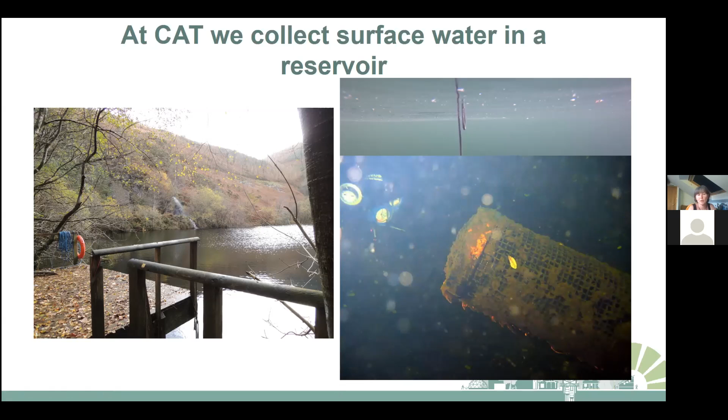So we use a kind of pipe here. As you can see, it looks very nautical. It's kind of a mesh pipe, which means we don't accidentally suck in fish and other bits we don't want. It's actually got its own biofilm growing on it, which does a little bit of water filtering as well, interestingly.

Then it travels by a pipe that you can just about see in that image. There it is, comes up better. And that pipe travels downhill. Now that's quite important, that we're using the natural availability of slope to carry our water from the top of the hill to the bottom of the hill. And that pressure of water that goes from above to below, the kind of potential energy in it, is called head. It's a word I might use later.

Okay, so what could be in this water and how do we get rid of it? Before that, I'm going back to this one. I think there's a little poll that Meg's going to put up. What are your instincts telling you about this water? This is something I would do with my students or my tour people, and we would actually get a glass of the water and look at it, feel it, and smell it, and say what our gut feeling was about it.

So I'd like to ask what your gut feeling is, if you're able to answer this little quiz. The preferences are: yeah, that's fine, safe to drink. Maybe I would drink it if I was really, really thirsty. I'd only drink it if it was boiled or filtered. No way, get me to a tap of nice water where I don't have to think about where it comes from.

Okay, we've got some answers. Oh, they're coming.

Okay, so the instincts are: 6% are saying yes, safe to drink. I'd say these would be the ones who'd maybe be a gambler on Who Wants to Be a Millionaire. Then there's drink if I was really thirsty - I probably come into that category, and I also know what's in it, so that helps. I'd drink it if it's boiled or filtered - that's a sensible answer, most people have answered that one. And it looks like maybe one person is really not happy with even the idea of answering a quiz to say they might drink it. So that's great, thank you very much.

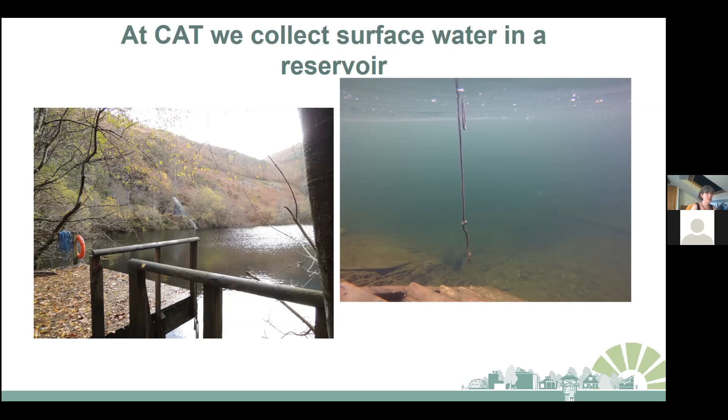Okay, so what's in the water and how do we get rid of it? The most urgent and potentially lethal things are microorganisms, dead animals, or poo - basically that's the most dangerous thing. And the microbes that are dangerous to us generally live on mammal poo. So how do we get rid of it? The good thing about microbes is we can kill them very, very easily just by boiling.

So it's great if you're by a campfire and you can boil your water, and most places in the world have facilities for boiling, so that's great. But if we're doing that on a larger scale, we can't boil every milliliter of water that comes on site. So what do we do instead?

There's several options. I'm going to just gloss over, but then we're going to see what we actually do. You can use a sand filter, a mechanical filter which sometimes uses energy, an activated carbon filter which has got a lot of embodied energy behind it, a reduction oxidation filter, or a chemical, which is the most common way water is cleaned, and that chemical is chlorine.

Chlorine is an amazing chemical because it kills all these pathogens, and it doesn't just kill them at the source, it kills them all the way along the pipe until it comes out of your tap, which is why we're used to very, very clean water. There are some issues around it, but basically it's kept Britain and many countries healthy and not dying of dysentery in their infancy. So it's a good thing in my books.

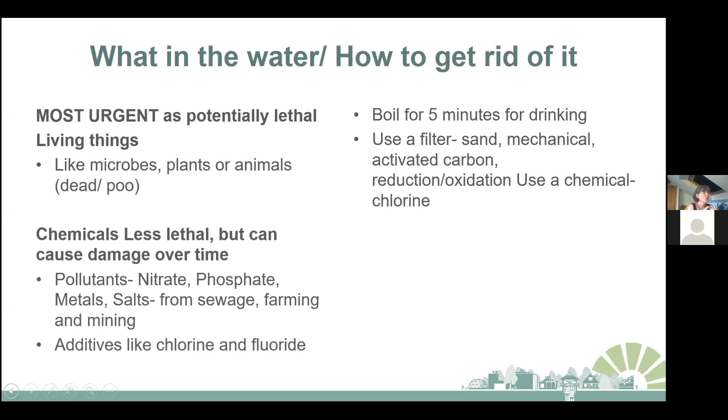Then there can be metals and salts from sewage if you're in an urban area, or from farming and mining if you're in a rural area. So we've got quite high copper in our reservoir, which is why it has that lovely blue colour.

And then you might have these additives in your water, which are chlorine and fluoride. Fluoride comes naturally in a lot of places. It doesn't happen in Wales, but it happens in lots of other places.

The thing about chemicals is you can't boil them away, so you'll have to filter them in a different way. The main way we use on a small scale is an activated carbon filter, which has this added embodied energy. If you were in a large-scale sewage treatment system, you would do something called chelating them out - you'd put dolomite in, and it would settle it out, and you'd throw that away. It's quite linear, but it does get rid of dangerous things like arsenic and lead out of your water, which is very important.

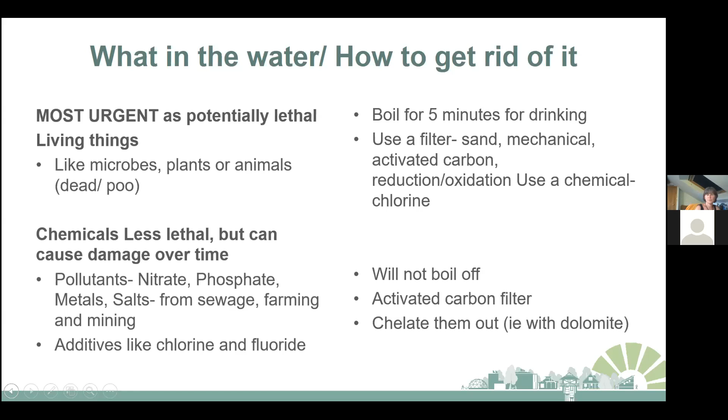So types of filter we might want to use, I put them under three main headings. We've got the zappers, which literally blast the microbes and burst their cells. Then we've got the sieves, where the water goes through and the lumps stay behind. And then we have ones that I call sticky sponges - the microbes and chemicals stick to the surface of them, and then they can be pulled off by other microbes and used as plant food.

So these use a thing called adsorption, which is a bit of physics, but it acts a bit - if you can imagine rubbing a balloon on your head and then sticking it to the ceiling, it sticks there, but then it's really easy to pull it off again. It's a bit like that, but that's an oversimplification.

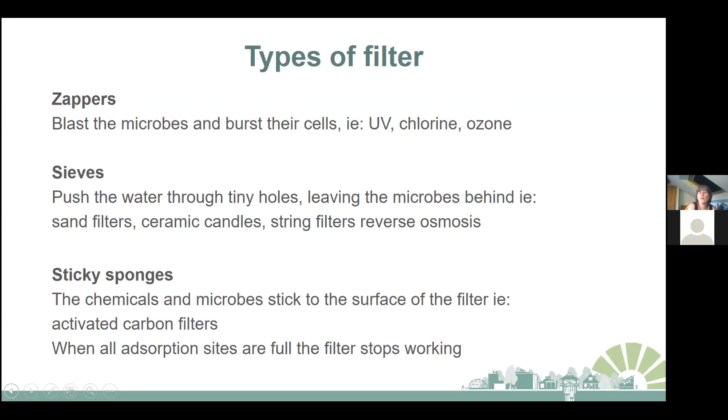And this is part of our living laboratory that we always have, is that we'll always try something out, and if it doesn't work, we have to try something else. And that's okay, we find out new things.

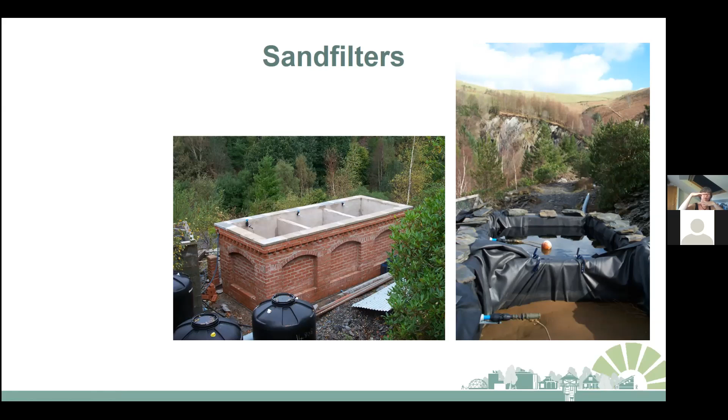And then the water slowly, the old water, the new water keeps running in, and it slowly goes down through the column and out the bottom. And that looks a bit like, hold on, it will come in a second.

Yeah, it acts like a sieve, and it's got a dirt layer, but this is what it looks like. So this one in the image has got a lid, but we don't have to have a lid. We don't have issues with mosquitoes coming into our system.

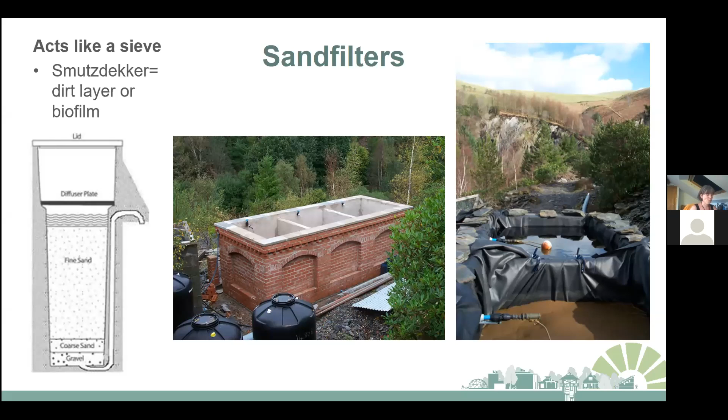So this is a picture of the Schmutzdecker, which is a German word for the living layer, or dirt layer, or biofilm, if you want to call it.

And there's some lovely MSc students. Oh, that's really nice, with that layer there. If you were one of my students, I'd say give it a sniff. So just think to yourselves what you think it smells like. And the answer is, it smells like river fish. It smells really quite pleasant, not horrible, but it smells of river fish.

And that little layer there, you see the little brown layer there, is the Schmutzdecker, and that does part of the work of the sieve. So part of it is physical, and part of it is microbial and biological.

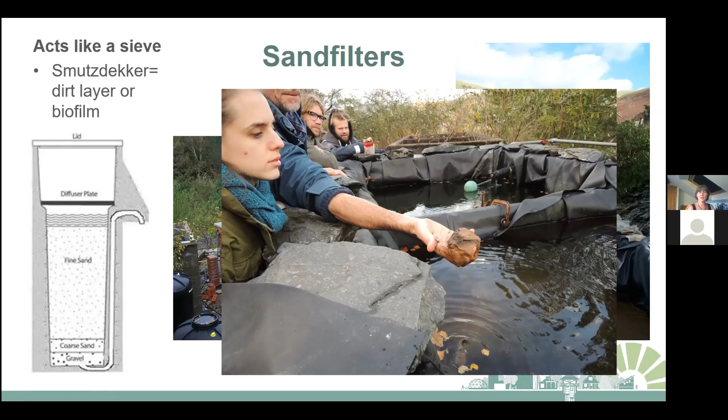Okay, it goes through a UV filter. So when I first worked at CAT, we didn't have a UV filter. We just drank the water, and very occasionally the odd person would get a bad tummy from it.

That was not okay after we started to get lots of visitors. So we now follow, it used to be the Environment Agency, now it's the NRW, which have rules on how much microbes, if you like, are allowed in the water.

And the answer is they have certain indicator species of bacteria that they grow on a plate, and they put it in the oven and grow it for 3 days at human body temperature, and they bring it out and they say, how many units have we got here? And the amount of any of those types of units that they can test is 0, because you can do 0 with chlorine. So it's 0 for Britain, 0 for all over Europe, I think.

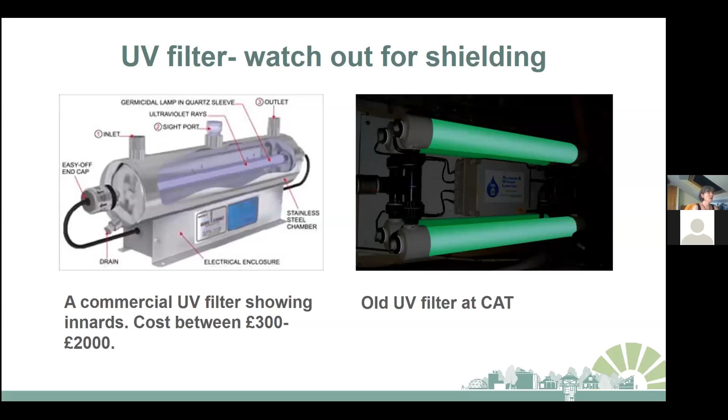So what we have to do at CAT is we've invested person power and energy into this system, so it's really important to make sure we use less of this precious resource. Actually being in charge of our own system really brings that home - you don't want to waste it, even in West Wales where it rains in metres, not millilitres.

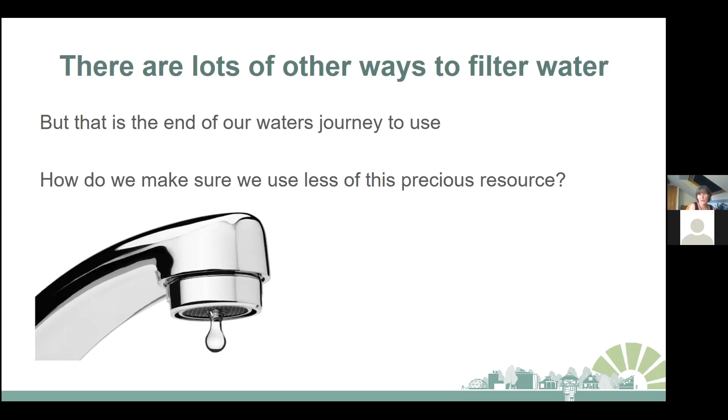Using low water appliances isn't terribly in the consciousness of the average UK dweller. It just isn't. When you go to buy a new fridge, for example, they'll say, come and look at this one, it's the super new AAA rated one, it uses hardly any energy, it's great, you've got to have this one. They won't say, actually you've got a third less freezer space, or other downsides.

But with water, has anyone been to buy a new bathroom? I'd guarantee, because I've been looking at a bathroom recently, that you actually have to hunt for the low flow appliances. It's all about luxury - I paid for my water, therefore I'll use a lot. So things like this, I know, they're very niche.

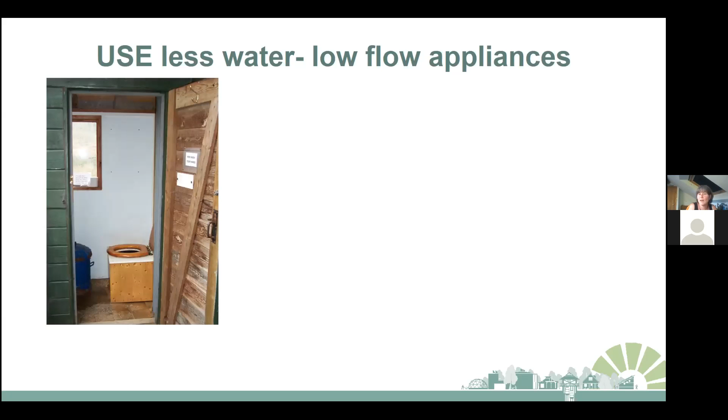I can see you all chuckling, thinking yes, maybe in my smallholding, but not in my house. I agree. These ones use no water, but there are times these might be very useful in Britain with this weird droughty climate. We might all have to have a second loo outside, which is a compost loo. There's a more posh compost loo too, for those who've been to CAT. Both really simple, both easy to make - I'll do another one on them maybe.

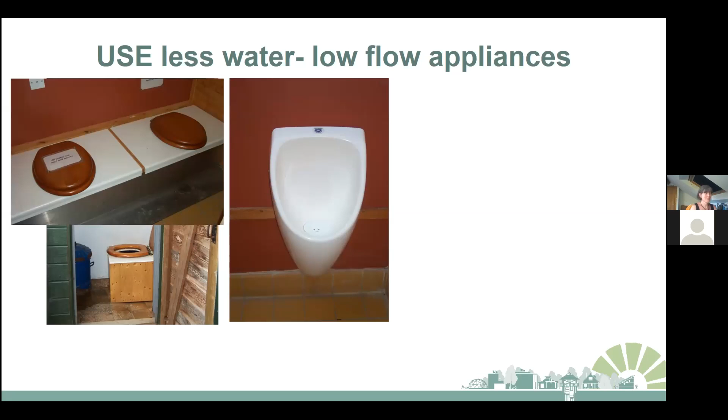This is a waterless urinal. Most people won't have even seen one of these, but it's basically a urinal that uses no water at all. Sensible - every service station, school, everywhere should have one. And I'm hearing they're on people's allotments now and they're great.

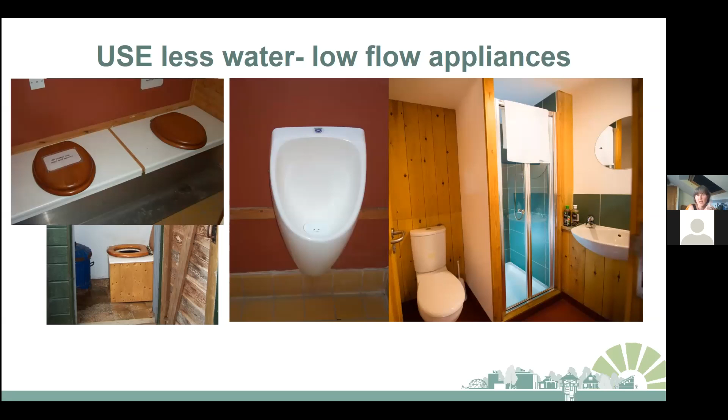This is WISE, a little plug for WISE. In WISE we had a really tight budget, but we still managed to make all the toilets low flush toilets, and the showers have a special little thing in the top which makes them use less water. And of course there's airflow taps, which I just showed in the last image.

I can't see what I've written because the panel's in my way - hold on a sec.

Oh yeah, okay, so we've used the water and we've got dirty water again. And it's better that we know what's in our sewage.

At CAT we're not a household, which I'm assuming most people on this webinar will be, but we get a lot of visitors who aren't used to not using the mains. So we will get, and I have seen, all of these things in this unsavoury 'don't flush down the toilet' picture in our settlement tanks, and sometimes all the way to the reed beds. Not very pleasant - best not to use them.

A lawnmower has just started up, so I'm going to have to shut the window. Hold on a minute.

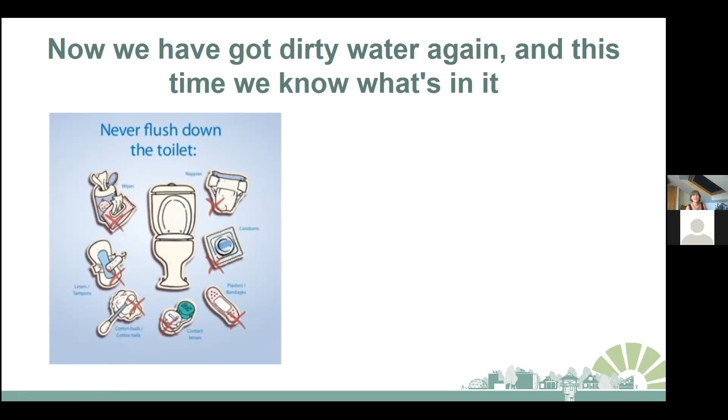Right, I'm back. Okay, so shampoo.

So what's in shampoos? Unless you buy eco shampoo, you can get a lot of phosphate in shampoo, and phosphate is plant food, but if you get too much of it, it's a really strong plant nutrient that causes eutrophication.

It causes the green river problems that we don't want. Then your kitchen sink is full of bits of food, and the troublesome bits are generally the oils and fats and the lumps. Washing powder, again, can be very high in phosphates. And coffee grounds - coffee grounds used to drive me mad when I was at CAT. They used to get everywhere. They really do get everywhere.

Anyway, so we know what's in it. This can be in it. But mainly, once we know that it's our own system, we can take measures to reduce these things.

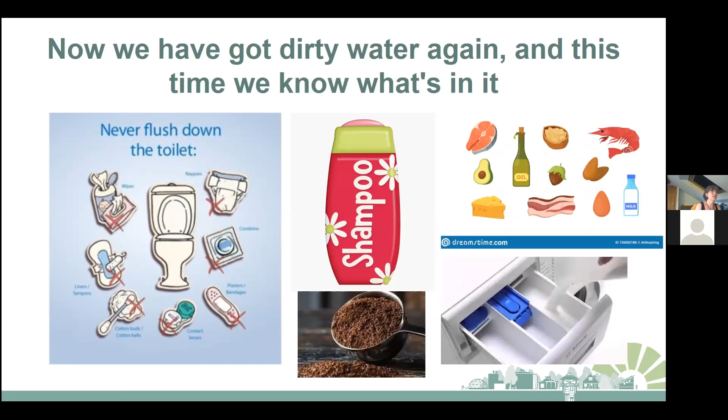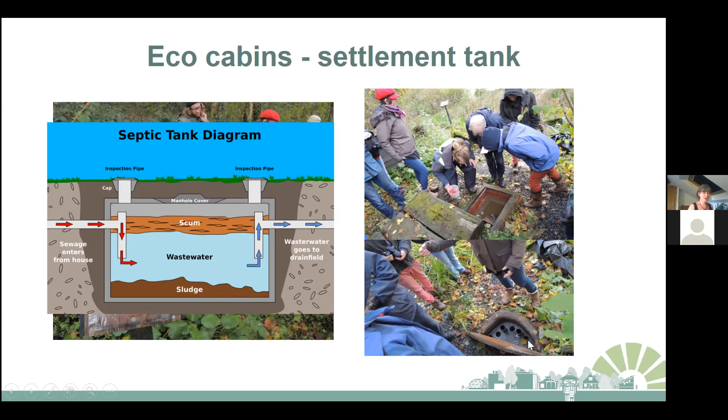Right, so this is called a dosing chamber. That's a dosing chamber - this is siphon, that's a dosing chamber. And the bottom one, we're going to three different places, which we're about to move on to in a second. And those places are, you've guessed it, reed beds.

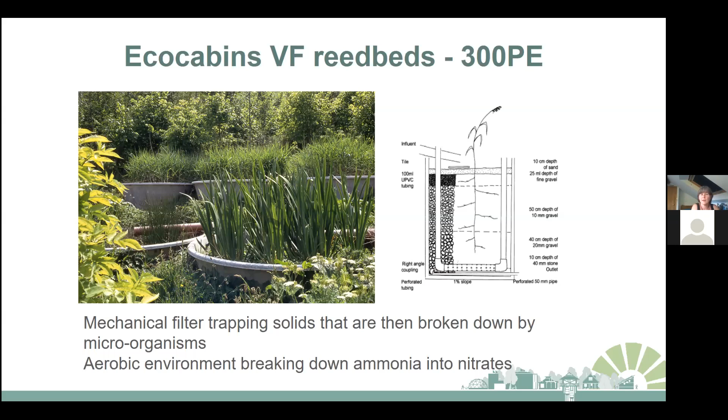And this one here is where we get the nutrient cycling going on. So we can grow plants in this that are above ground, i.e. you wouldn't grow carrots in it, and you wouldn't grow anything that would touch sewagey stuff, but you can grow things like tomatoes and tall things where the fruit dangles off. Or you can grow nutrient-rich things like cabbages, and then you can compost those. So you're taking out the nutrients and recycling them, but turning them back into minerals. You're not letting them into the water and causing troubles. So I haven't seen that done for a while, I can't, but I used to do that.

Anyway, then you see the water coming out here at the bottom, and it goes along this little pipe. So if you're building your own system, you wouldn't necessarily want this pipe showing, but because we're showing everyone the system all the time, it's great to have the pipe showing.

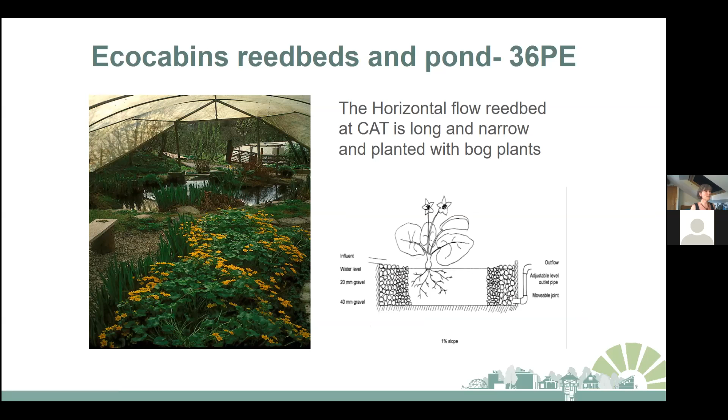So this is the pond. This is the stuff we were cropping. Prince Charles came to have a look at it one year, long time ago now, probably 90s, 20 years ago, something like that. And it was looking all beautiful like this, and he smelled paint wherever he went, as always.

And he's got one of these in Highgrove. And so he said to me, 'Oh, that's amazing, Louise, you've managed to have a clear pond. That's amazing. Mine's always covered in algae.' And I said, 'You know, I've been waiting here for about an hour, there was nothing else to do - I've just composted it all over there.' So that was my amusing, kingly, princely anecdote.

Okay, so it goes into there, and then from here it goes into one willow, which is just outside the pond. And the Environment Agency used to come, when they were still called that, and test our water, but they soon stopped after twice, because they realised that even in the winter they'd get maybe one drip every minute, so they'd have to wait too long for a sample. But also when they did test the sample, it was super good - low indicators of nutrients and bacteria in the water, which was great.

It would have got a blue flag for bathing water quality, so bathing water wise you could jump in this pond, but it would be a bit tricky to swim in it because it's only ankle deep.

Okay, oh right, so I'll stop there and I'll go back and answer some questions. I'm just wondering how I can reach the first questions - they seem to have disappeared.

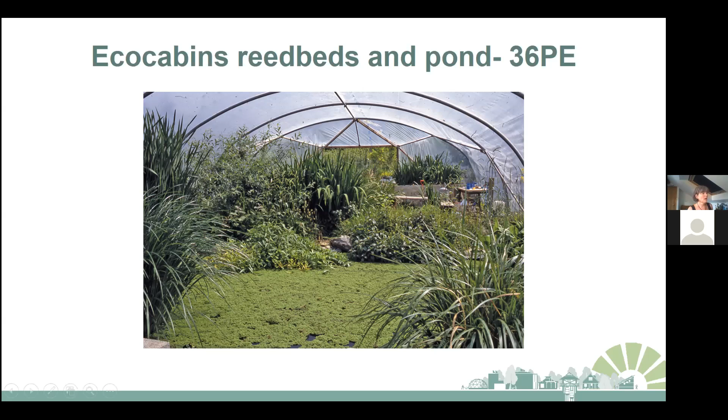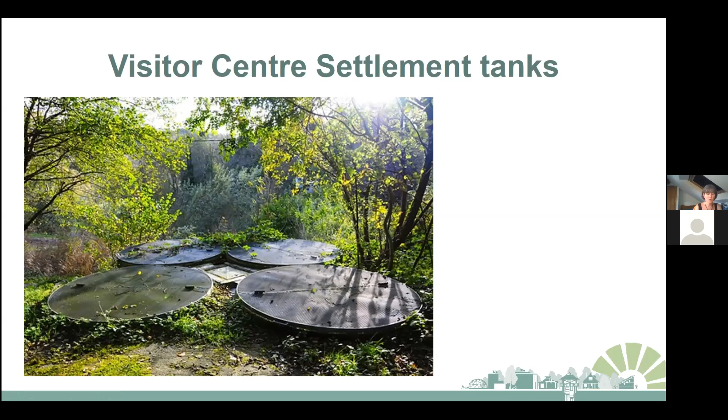It was more like this, which still makes me laugh. Oh my goodness. When I first came to CAT, I was presented with this after coming out of academia into real practical work - it was a bit of a shock. The volunteer, which was me at the time, had to climb in and unhook each of these little white things off the fishing net, and then this was picked up by a digger. There was a little fishing net clasp right at the bottom where that arrow is. It was the most revolting thing.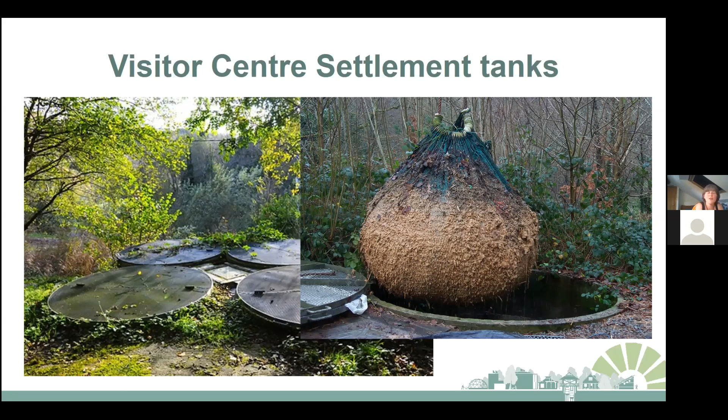And we, even in 2010, had reed buntings and little tweety wood warblers and all sorts of birds, which you just would not have seen when it was a field. Just loads of wildlife was in there.

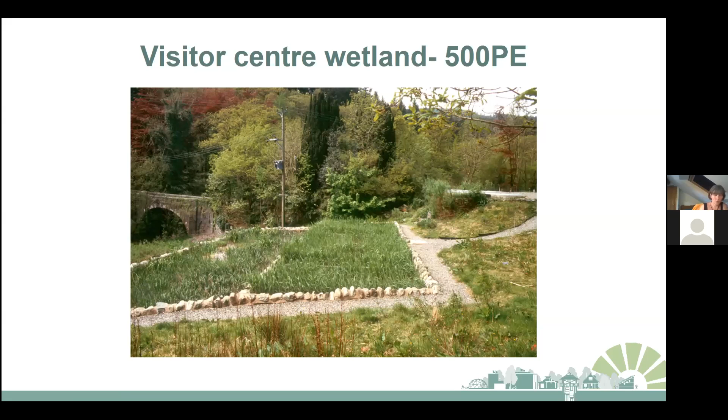It's really, really simple, but it takes a bit of power to dig these trenches for about 300-400 meters. It takes a good few days to dig them and then to keep them clear in the winter. But our willows are amazing, and they grow to sometimes 3 meters in a year, which means they're really good.

You could dry them for biomass. They're really good for replanting. They're not great for basket weaving because they're too wet and sappy. But that is another thing we call polishing, the same as the pond in the last system. And it kind of gives a final polish to that water and takes out those last little bits of nutrients, adds a bit more wildlife.

And by the time it gets to the River Dulas, there's a tiny trickle. I think, if I'm right, the catchment is just before this tree. There's a little outflow pipe that I rediscovered under the brambles, and I went to have a look, and there was literally nothing coming out of it. That was about probably 8 months ago.